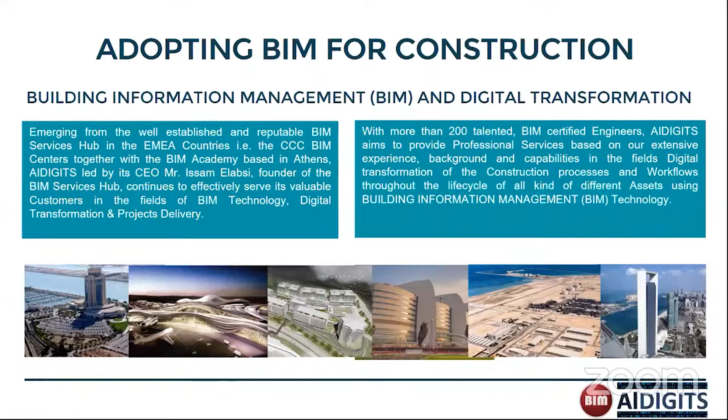So we have more than 23 years of hands-on quality work, more than 200 projects in diversified fields including civil works, oil and gas, hospitals, infrastructure works, more than 20 million square meters of building space and infrastructure layouts, and more than 45 billion US dollars in value of works.

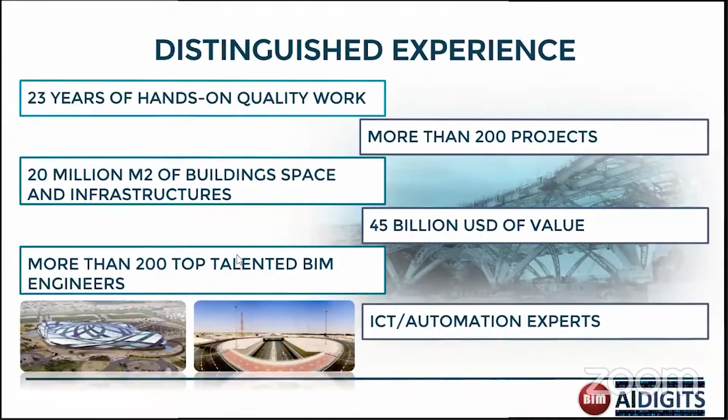Our team consists of more than 200 talented BIM engineers and a group of about 50 ICT and automation experts. Just in the beginning, I would like to tell you some basics about the way we work.

So if you want to do really an effective utilization of this technology, you need to look seriously into integration between the different applications and the different functions, the different systems, and the different people in an organization or in a project. This is the philosophy and the heart of our operation.

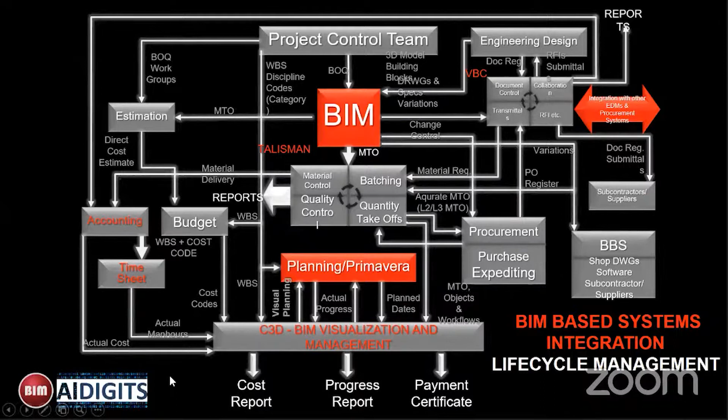And as you know, interoperability and data exchange between clients, between stakeholders, between the different partners in any system or project require a serious look towards interoperability and data exchange. That's why we give this topic a serious look, and we have developed what we call the electronic data interchange. This electronic data interchange is the start of any relation between us and others, or between any partners working in this technology or around information exchange and information management.

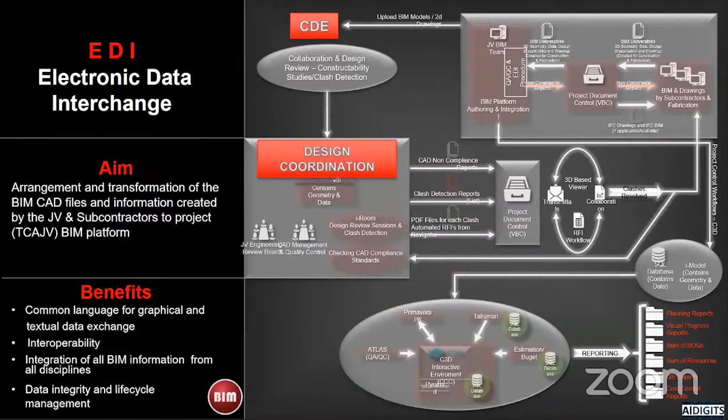The third fundamental for our operation is scope management. If you want to do anything properly, you need to understand how to quantify it, how to measure it - whether it's a space, an area, material to be bought, equipment to be utilized, or resources to be deployed. So you need to understand very well the scope of what you want to build, what you want to manage. And once you know it well, you can plan it well, and definitely you can do a lot of things to control the operation of that facility or asset.

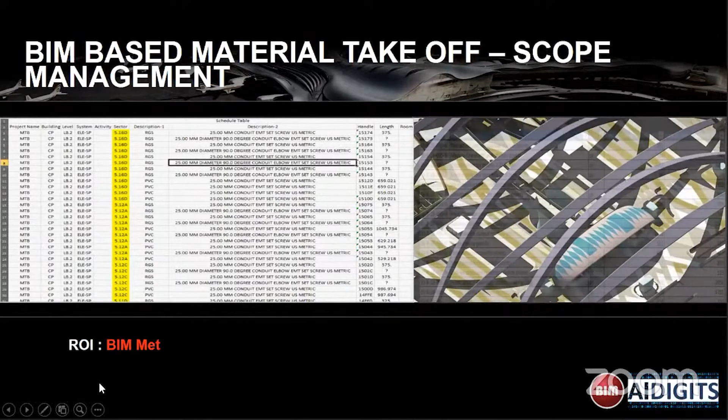The fourth basic fundamental for our operation is how to name assets, to work with objects. These objects must have a unique identifier, what we call an asset tag. And this asset tag needs to be maintained through any phase: design, construction, post-construction, handing over, facility management, operation and maintenance, even integrating with GIS, integrating with IoT.

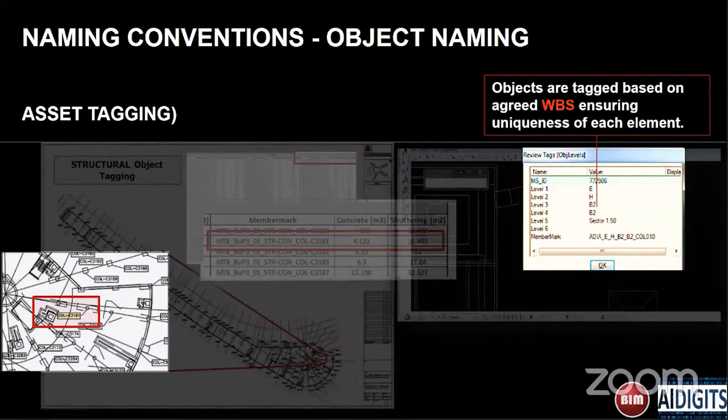So we need to have an asset, and this asset needs to be tagged, needs to be captured. All the information for that asset needs to be hosted in a central data integrated repository with all the information about this object specifically - which means the whole facility is in one central data repository, carrying the shape, the functional characteristics, the physical characteristics, the documents, all the information relevant for that asset in one system. And this is one of the basic fundamental ways we work and operate in the BIM field.

Last but not least, it's very important to capture information. You need to structure it, save it, and then disseminate it, share it with other stakeholders, suppliers, partners. Collaboration and data sharing is fundamental in our work. And of course, collaboration, workflows, and workflow management is also important to our business.

Now let's talk about the relation between the banking sector and the construction business. It is obvious that there is so much dependence of the construction sector on the banking business. All the supply chain of projects in construction takes facilities from banks, whether main contractor, supplier, subcontractor, or logistics. All of the construction process utilizes bank facilities in their operation. So there is huge dependence of the construction industry on the banking sector and the other way around. This is one important synergy where the banking system and the construction sector overlap.

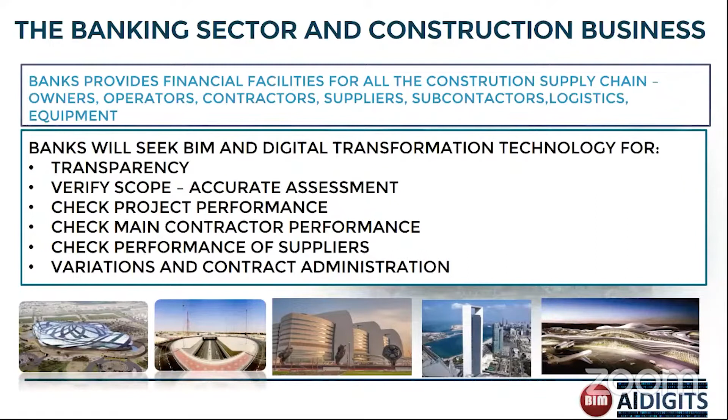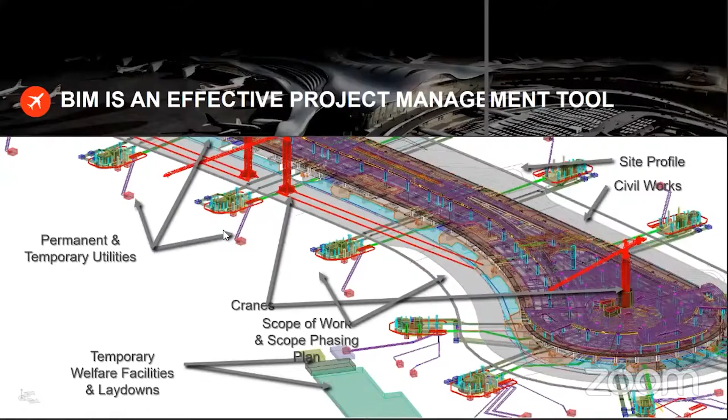When we talk about banks being owners for projects, the bank is not looking only at the performance of the project. It is looking to ensure that his facility is delivered in time, with the proper quality, according to specifications. He also needs to control the cost and the budget, making sure it is maintained and expenditure is minimized. In the construction business, BIM has proven very effective as a project management tool.

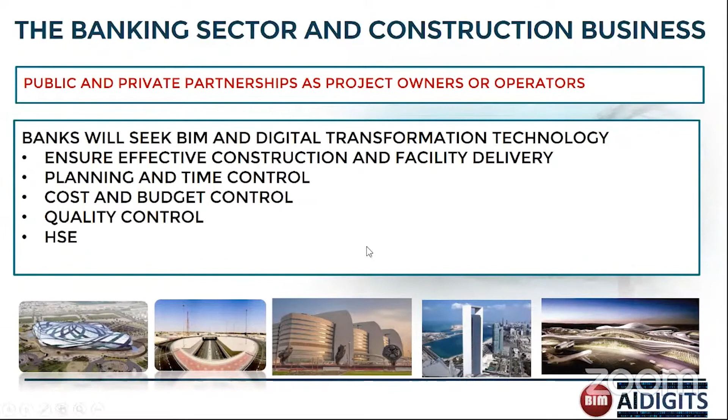There are many functions of project management, including planning, time management, progress monitoring, quality control, cost management, and payment certificates, creating a dashboard where the bank can check the performance of his facility: whether the designer has finished his work, whether the contractor has finished properly, and whether a payment is due and credible. All this can be extracted for the bank as an owner of a project to achieve a certain target.

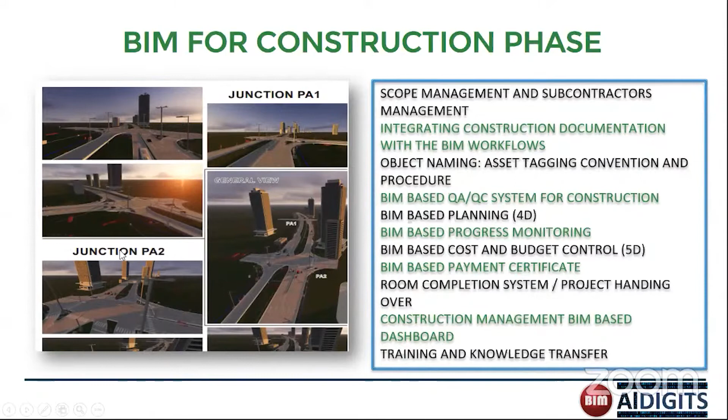From our experience, we have realized important benefits for the construction industry when BIM is well positioned and executed through the entire supply chain of the construction process. You can see great savings that can be achieved, and the owner of the facility can get a huge return if he invests early enough in a complete and comprehensive platform that drives the construction process digitally, creating a digital transformation platform where he can execute, see, and follow construction operations from A to Z.

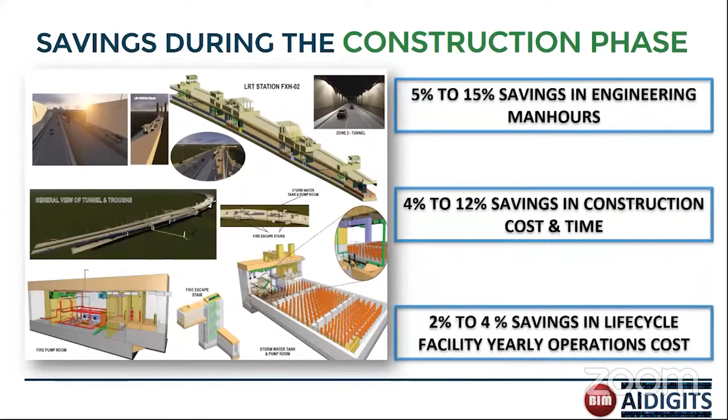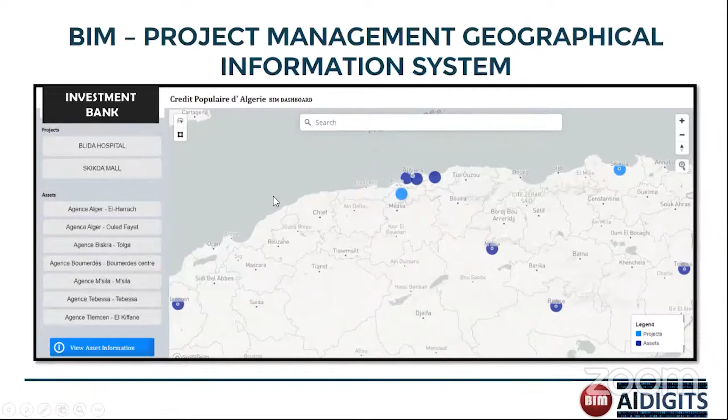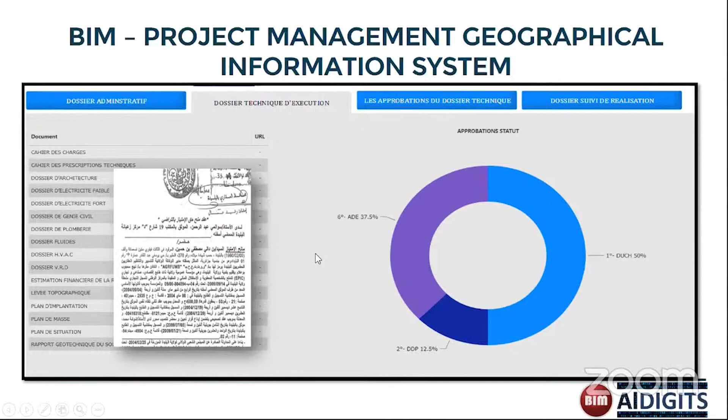This is a dashboard. The bank can check the status of permits, the status of documentation, the design, and the percentage progress of procurement through the dashboard for each and every project. He can also witness visually each project's progress in a BIM environment shown in color, so he knows, for example, green is executed, gray is under construction, or blue is 25% progress.

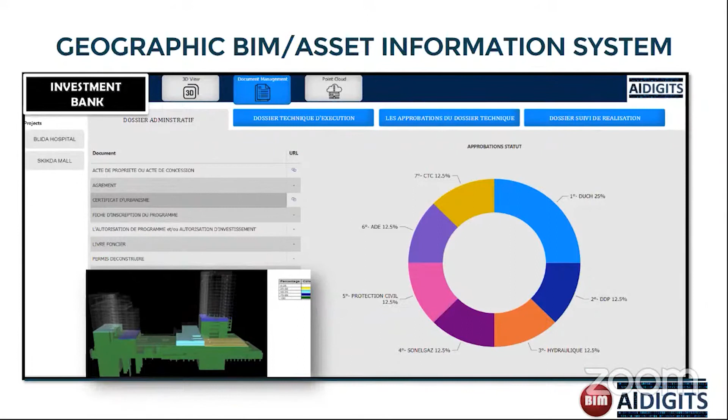The third topic is collaboration between the banking sector and construction business, and how BIM is leveraged in this cooperation. When banks have a lot of assets, buildings, and facilities, inside each and every building there are tremendous amounts of assets: chairs, furniture, equipment, mechanical assets, electrical assets. It is very important for the bank to be able to witness and see all these assets in a huge database.

This database is connected to an analysis and big data platform, where the bank can make good projections of the performance of his total portfolio of assets: how much he is spending for maintenance, for operations, for preventive maintenance, and for repairs. So he gets a holistic view about the performance of his assets, in a certain branch or across all branches.

He can also go deeper using this technology by integrating the assets with IoT sensors, so he can have an as-built digital twin of the asset, and a dynamic view of the performance of each asset through the sensors connected to it. So he gets an as-built condition and performance dynamic database, allowing him to check the performance of assets for a certain branch or for the whole portfolio of assets he has.

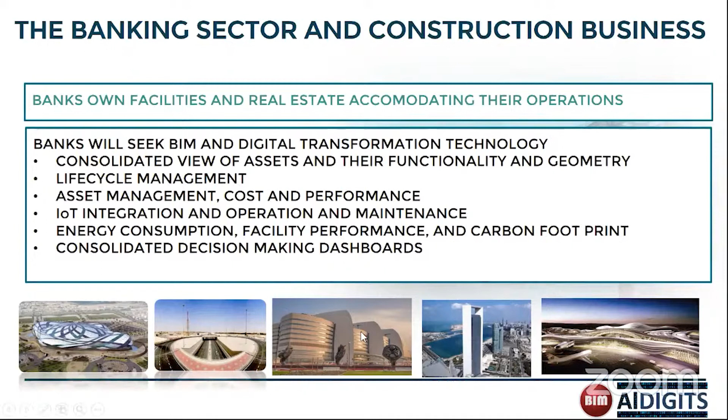Definitely during the operation and maintenance phase, he can achieve through that integration a tremendous amount of return and benefits.

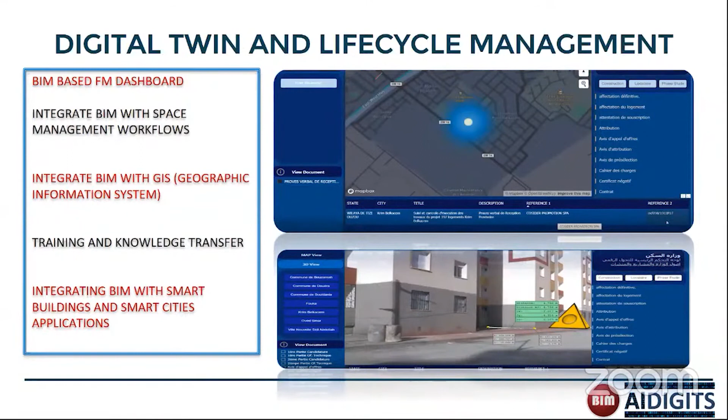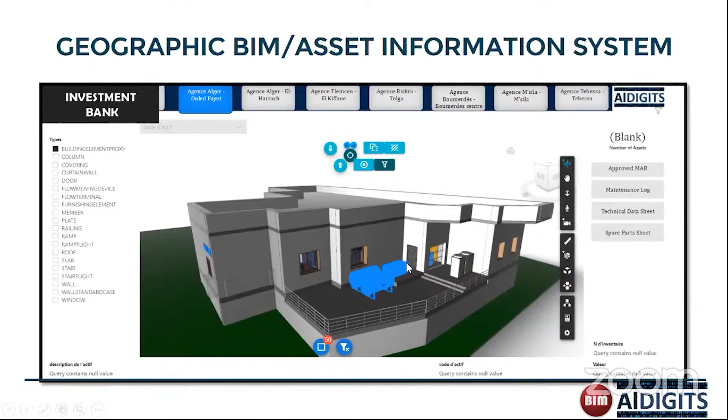I would like to take you to a couple of dashboards we developed for banks, where they can witness the performance of certain assets. For example, they can go to the dashboard, select a certain branch, and check the price of that asset, the performance of that asset, when it was last maintained, what was the cost of maintenance, when is the next scheduled maintenance, and then do a comprehensive maintenance cost for the whole branch, or for all the branches together at year end.

As you can see, you can do a lot of filtering and manipulation of data. Those are all live data. This is an example from an existing use case for one of the banks in Africa.

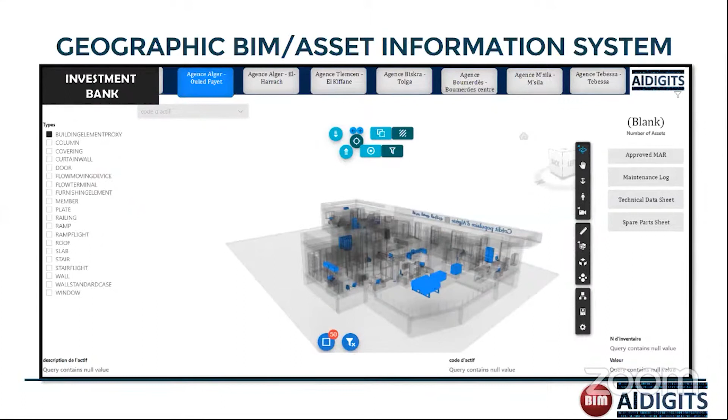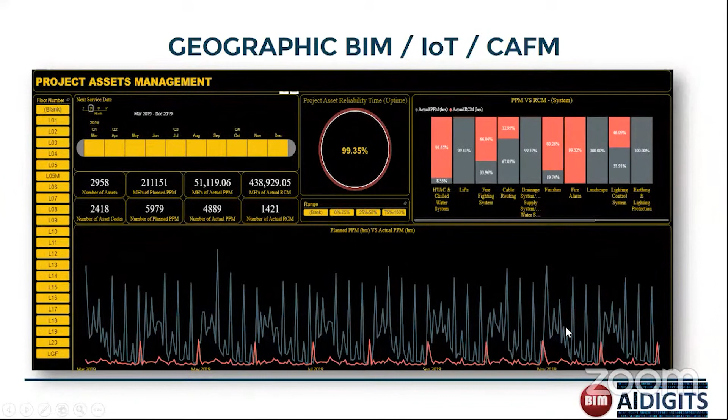As I said, you can integrate this with an IoT system, and for one of our clients we integrated 26 different IoT systems with our dashboard, with our central BIM data repository. So you can see a 3D model for each asset. You can check the temperature, the performance, the quality of air in that room, the presence of persons in that room, and have an integrated view for all the branches at the hands of top management or executives, where they can make good decisions about the performance of the building or the whole portfolio of assets of the bank.

Last but not least, I would like to talk about banks and their support for innovation, sustainability, green buildings, and circular economy. As you know, BIM is a huge asset in that because it captures all the functional characteristics of a facility with all its components. So a tremendous amount of studies can be done, designs can be enhanced to make building performance more green friendly, more environment friendly, reduce the carbon footprint, and enhance the performance of buildings in general.

I believe all these technologies are ones banks are interested in investing in, whether for their own facilities or for the facilities they are financing.

This is an example of very unique, innovative ideas where you can integrate BIM with manufacturing, creating a very robust and effective way of making the manufacturing process smart and more cost effective. This is an area where banks would like to invest with manufacturers and factories, so the bank invests in innovation and manufacturers receive the value as well as the banks. It's just an example for demonstration.

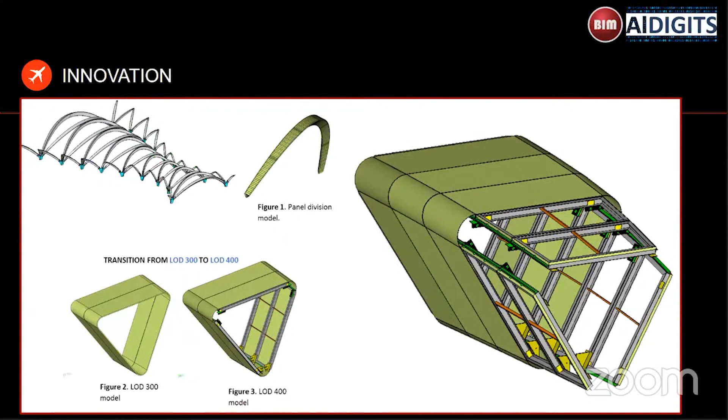We have utilized BIM very well for sustainability studies in many projects, and that's why I'm emphasizing the importance of banks investing in sustainability initiatives for integrating BIM with sustainability. This can be very fruitful for the supply chain of the construction industry and also for the banking sector.

This is the end of my presentation.

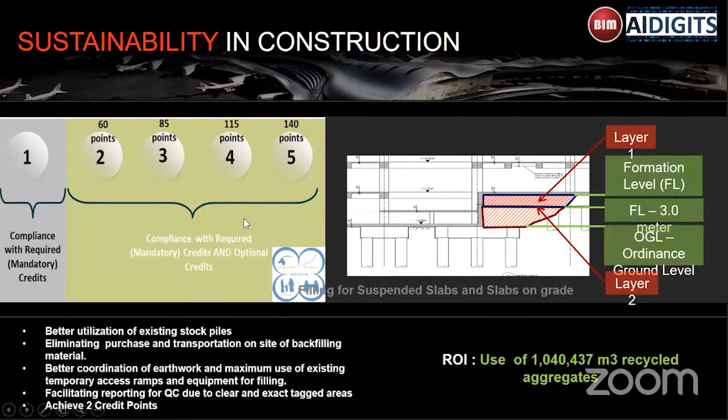This is felt in all the projects we worked on with all our clients, and I believe it is a very good investment for banks to look into educating the supply chain on digital transformation and building information modeling.